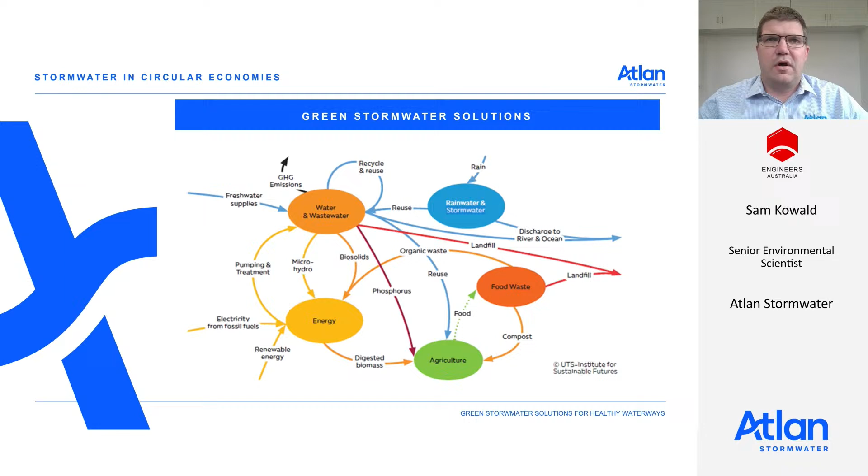The way we choose to design our stormwater systems is linked to the overall purpose and design of our developments. Where possible, we look to find ways to reduce and reuse resources, optimise space, and use existing design elements, such as open water bodies that are already being proposed, for additional benefits such as water treatment. We consider the whole-of-life costs of the asset we propose, and how it can be incorporated into a circular economy with manufacture that considers end-of-life, reuse and recycling. This provides us with tools to tackle complex issues like climate change and biodiversity while meeting local objectives for our projects. As advancements in stormwater treatment develop, they offer opportunities to help us meet some of the ambitious goals in sustainability and environmental management.

This is a brief introduction to the solutions I'll be going through today. The first is the floating treatment wetlands. This is a favourite of mine due to its flexibility and potential to deliver additional benefits, particularly related to habitat creation, back to the community and the environment. The second is the Atlan basin modular bioretention system. These products use the principles for water treatment we observe in nature, and refine through testing and research to deliver improved performance and functionality for our clients.

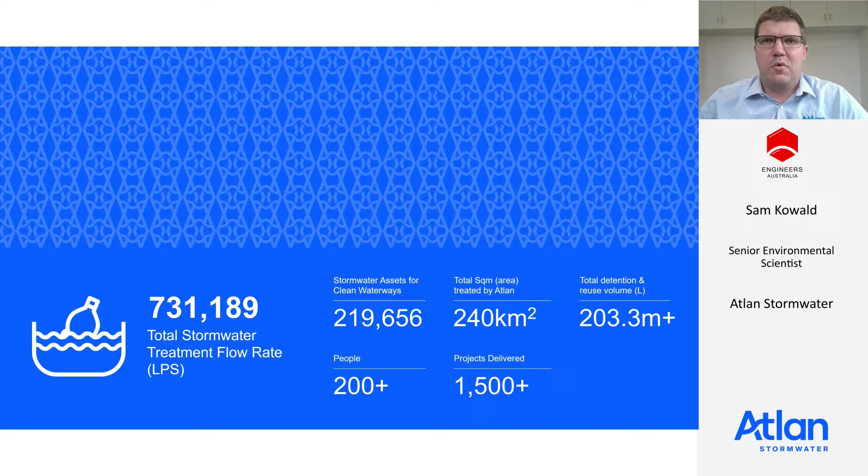At Atlan, we are proud to increase the joy in water experience for as many people as we can. We like to bring our knowledge and experience together with the project knowledge of the engineering team to find the best design to meet and exceed the expectations and objectives that we've been set for the project, always with an eye on where we can add more benefits for our clients and the community.

When we look at designing anything in life, whether it's a car, a mousetrap, a road or a wetland, we start with what we know works well and look to find improvements where we can. For us, nature has provided us with a baseline that works well. Through understanding the underlying principles nature uses, we look to enhance these to deliver the best performance possible, while incorporating design elements that make the system easier to work with and maintain.

The treatment principles we are using are nothing new. Nature has been using floating islands to process and remove nutrients and other pollutants from water runoff for thousands of years, just as it has with natural wetlands. We looked at the principles that were providing this treatment and developed our modular design based on our observations. We developed a structure that was easy to use and gave us the opportunity to control the layout and placement, making it manageable in the urban space and allowing us to bring the treatment concepts we found in nature to our clients' projects.

A critical element of the performance and function of each island is plant selection. This often starts with a proposal from our team, and then we work with other stakeholders and take their comments on board to select the appropriate species that will suit the site and provide the desired outcomes.

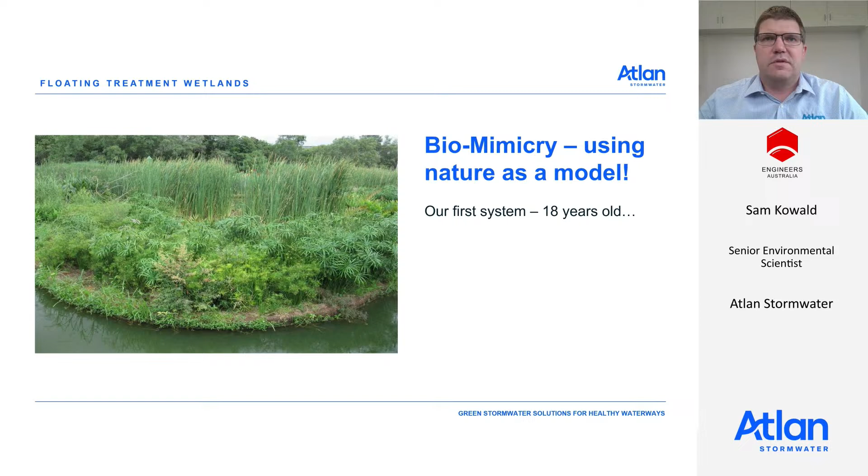Some of our industry partners like to include native flowering plants to attract butterflies, bees, and other insects. Others ask for unplanted zones that become nesting areas for water birds, or internal water zones that provide a protected water surface for aquatic species.

The roots below the islands and the plant structure above create a unique opportunity to build habitat above and below the island and treat the water to a high level at the same time. The root structure is also important to the overall pollutant removal capacity, creating an ideal structure for biofilm formation.

Part of our investigation into how nature treats water was looking at constructed wetlands and understanding how they work and what pathways they were using to remove nutrients and other pollutants.

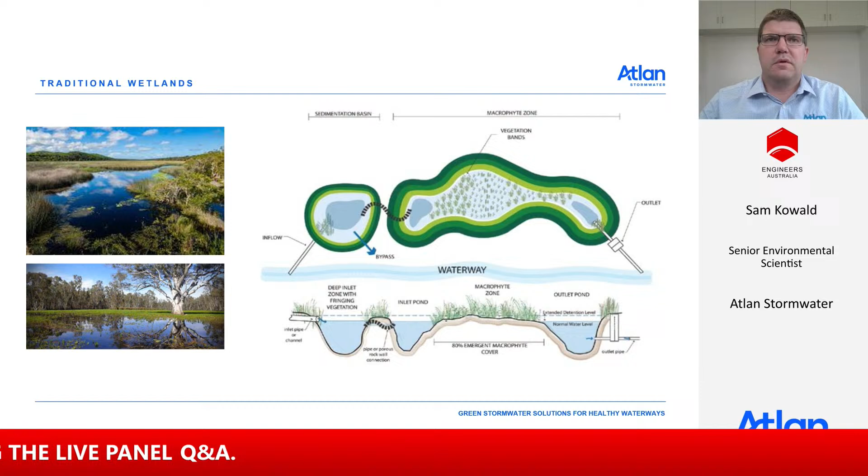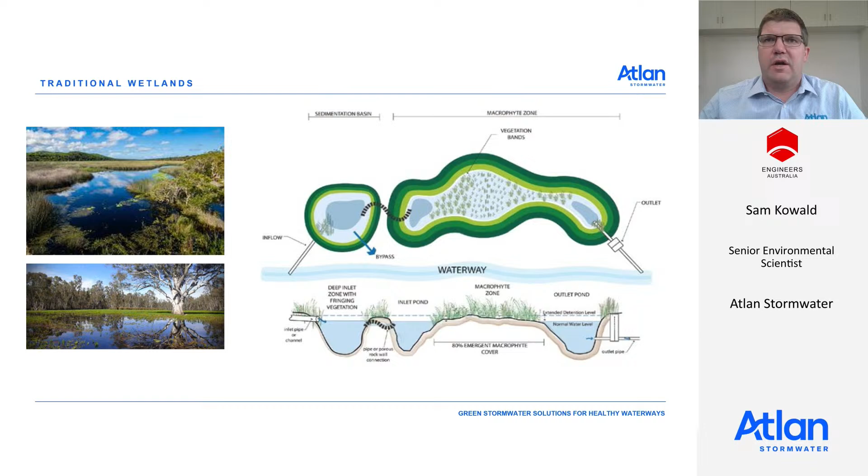Constructed wetlands use complex flow paths and deep and shallow water zones to increase sedimentation, promote plant growth, and provide a structure on the stems of the plants that are in the macrophyte zone for biofilm formation, allowing nitrifying organisms to grow and process nitrogen.

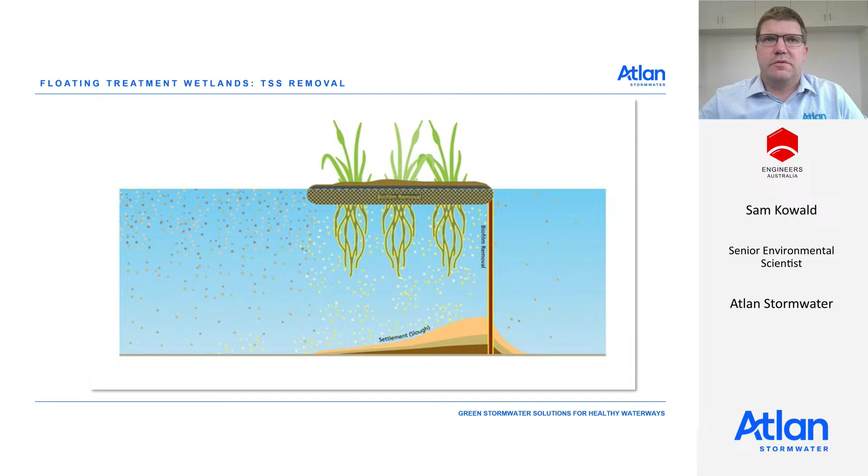Floating wetlands use the same main removal pathways as constructed wetlands, but each of them is increased. The root structure in the water column provides more sedimentation, and the sticky biofilm also captures particles from the passing water. When the biofilm collects enough particles, it will fall off the root structure and settle to the base of the pond.

The placement of the islands on the floating surface of the water means the plants are in their optimal growing location, regardless of the water level in the basin, increasing plant growth and nutrient uptake.

And finally, the roots growing into the water column provide a significantly increased surface area for biofilm growth, which increases habitat for nitrifying bacteria and other microorganisms that process nutrients.

Floating wetlands are a flexible solution to improve the functionality of our waterways and lakes. On a new site, we simplify the basin design by giving the option for a water body to be uniform in depth. On existing water bodies, we identify the optimal locations and select the appropriate position for the islands that works with the natural contours and flows in the lake or pond.

By adding islands and their root structure onto the water body, we add complex flow paths and replicate the deep water, shallow water, and macrophyte zones in the islands and open water section of the water body.

You have a massive design feature when working with open water bodies as part of your development, and if used effectively, there can be considerable benefit not only to your water quality, but increased habitat creation, and it can be an effective part of reducing the likelihood of algal blooms as well.

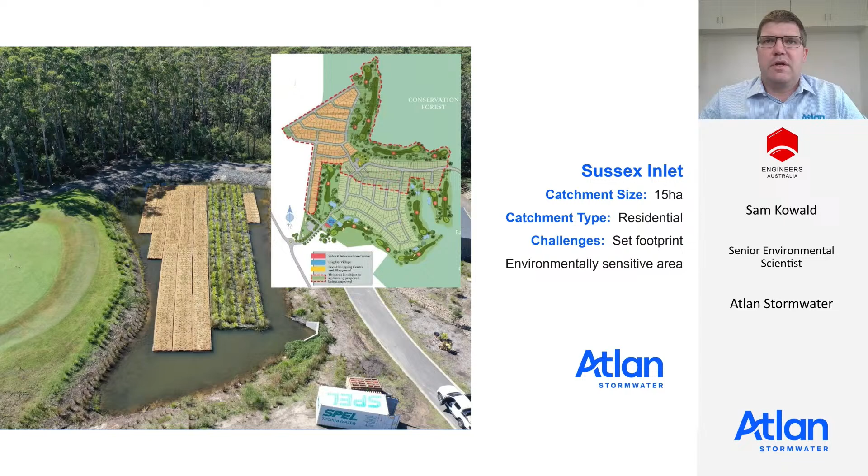The Sussex Inlet Golf Village is a development we have been involved with on the New South Wales south coast. It's a residential development that used floating wetlands as part of its stormwater treatment. Close to natural bushlands and designing around an existing golf course, the developer wanted to use the existing water bodies if possible to help meet their water quality objectives and protect the downstream inlet waterways.

The project was delivered in stages as the development progressed. After the installation of 200 square metres of floating wetlands in stage 1, the green and gold bell frog, an endangered species, was identified on the islands, and funding was approved to increase the floating wetlands as part of the stage 2 works.

Around 550 square metres were installed as part of the stage 2 project. The modular design makes the process of increasing the footprint of the islands simple if additional treatment is required.

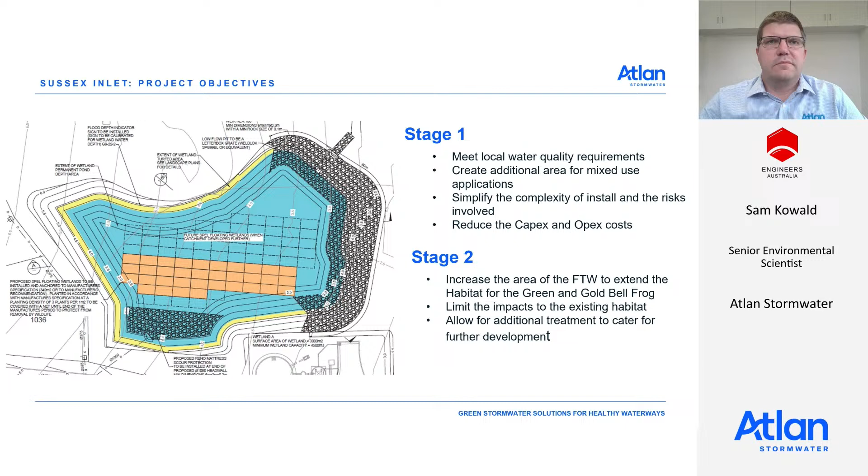The inlets to the lakes were pre-treated using Atlan vortceptors to remove gross pollutants and coarse sediment, allowing these pollutants to be easily maintained from a single location and holding the captured pollutants underground away from UV light. Then each stage of the floating wetlands was sized to mitigate the impact of the development in that stage.

We have had clients use our floating wetlands as nesting habitat away from terrestrial predators such as foxes, and fish habitats using the root structure. We know it forms a great substrate for biofilms, and frogs have been seen in various locations.

More commonly, we size our floating wetlands for water quality purposes, and our clients tell us stories of swans and ducks always sitting or nesting on the islands, or the fish swimming between the roots that their kids noticed when they showed them what they were doing.

We have found that using nature's principles in one area, such as water treatment, often flows on to natural benefits in other areas.

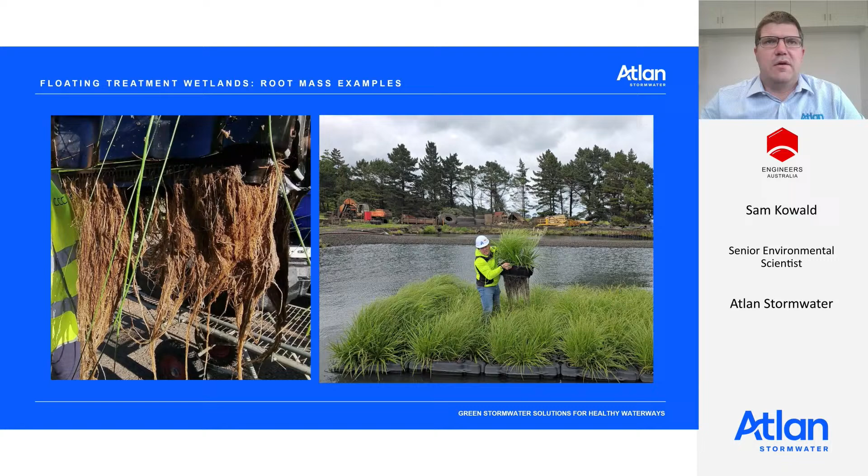Our latest improvement to our floating wetland design has been to offer more options and flexibility to our clients by moving to a smaller modular system. This allows us to adjust our layout and gives us more confidence in the structural performance of the system.

The new modules come with a flotation pod for buoyancy and a planting tray that allows us to adjust the recommended media to suit our plant selection if required. I had a client who wanted to use bulbs in their plant selection, and we decided that we would replace the standard media from one in every ten trays

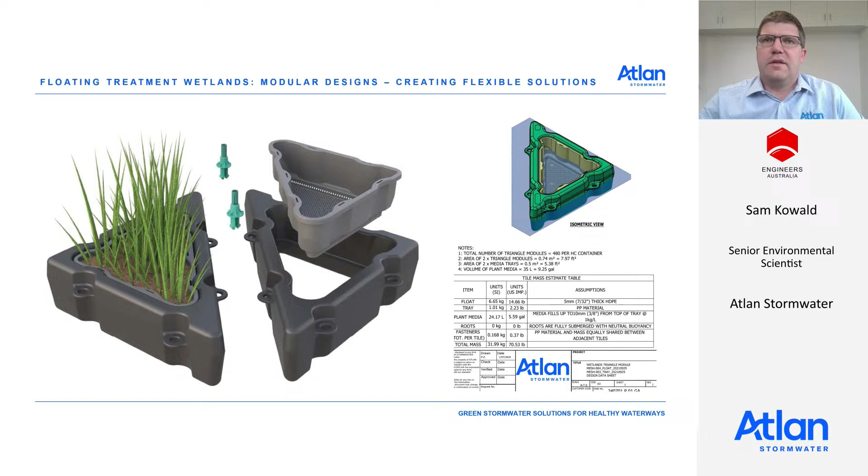to have more soil layer so that it would be more likely that the plant would work. As mentioned, our smaller modules allow our clients to adjust the design to include internal open water or give them the aesthetic they are after, whether this is a longer shape or an irregular shape to suit the contours of the bank on site.

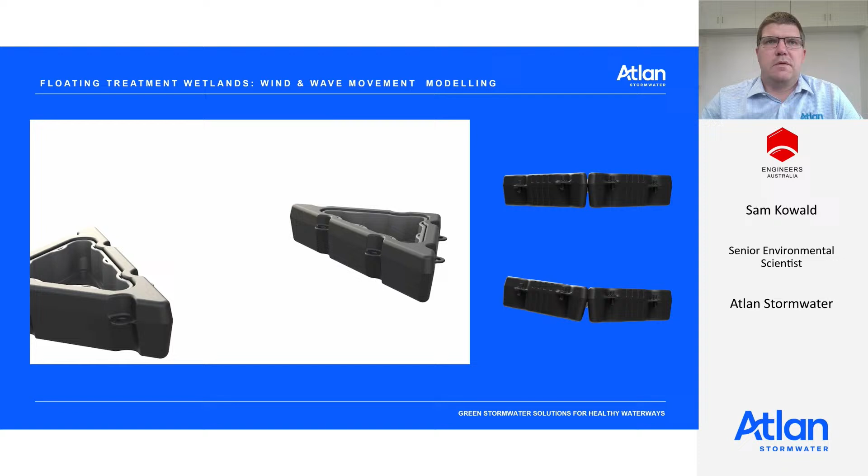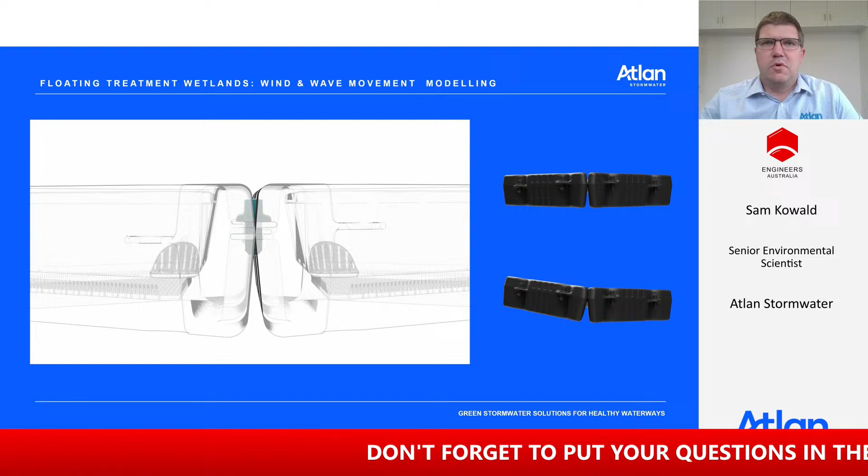Using our triangular modules and patented locking pins allows the islands to move with the water. Each connection can move up to 10 degrees up and down, reducing the forces that wave motion places on any given point of the design.

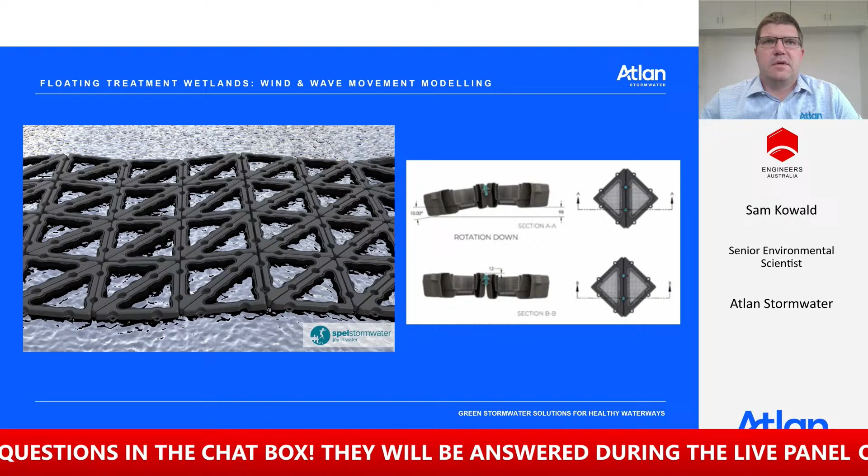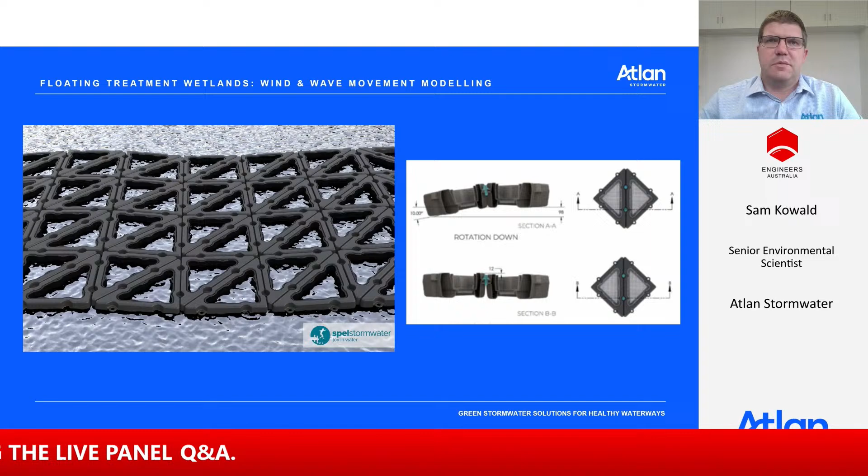Even in large island installations, the ability for each module to move relative to the module next to it means we can scale up our installations with confidence in the structural performance. Our systems have been externally structurally tested to ensure our anchor points and internal island connections exceed requirements of site, taking into account wind drag and water flow drag, and directing our anchor point and tethering designs. While our basket design encourages maximum interaction with the root surface and passing water.

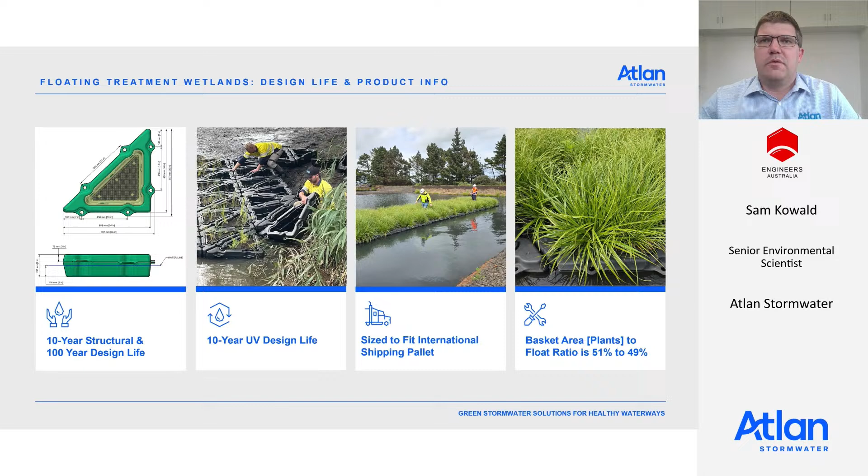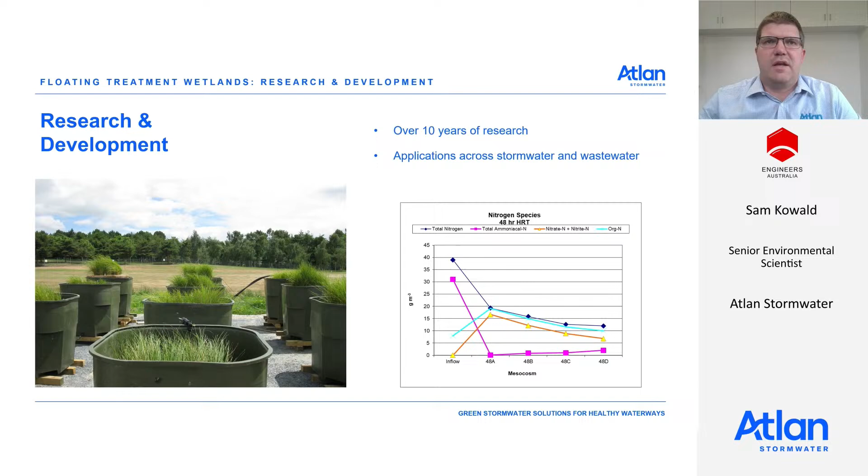At Atlan, we are committed to testing our products to the highest standards we can, and part of this is the independent testing we've done on our floating wetlands at multiple locations to understand what these systems are capable of. We have studied nutrient removal microorganism communities to try and better understand what is happening in the biofilm and plant selection. We are aware of other papers that have investigated heavy metals, PFAS, and methane reduction.

We commissioned an independent literature review of the nutrient removal papers available to guide us in our design process and removal claims, and this gives us confidence in the claims we make in the water quality space.

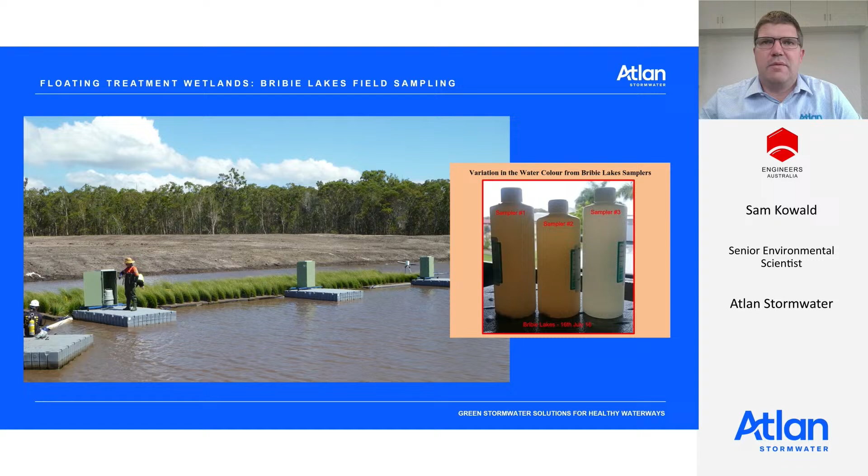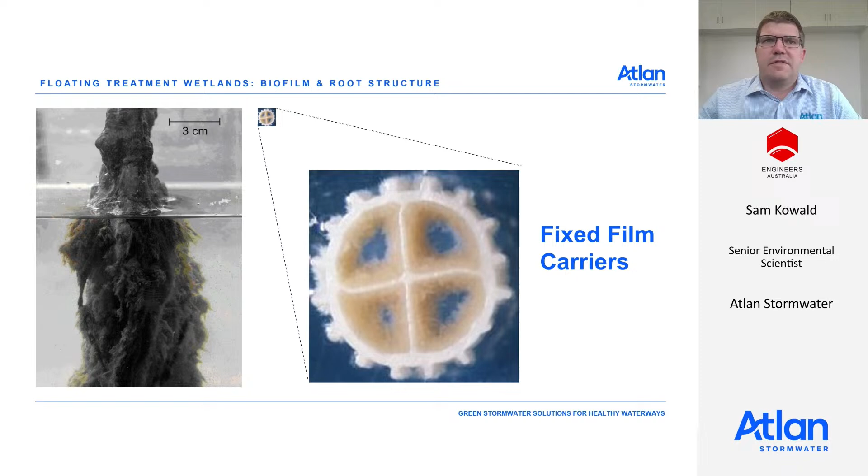As mentioned above, biofilm is one of the main drivers for nutrient removal in the floating wetland systems. As you can see, biomedia pellets commonly used in aquaculture and aquariums look to increase the surface area for biofilm formation as well. Any object that sits in a natural water body is likely to develop biofilm, and surface area is key to increasing the potential associated treatment.

Biofilm is an active living surface that provides an environment for a vast range of organisms, and some of these help to process the nutrients from water.

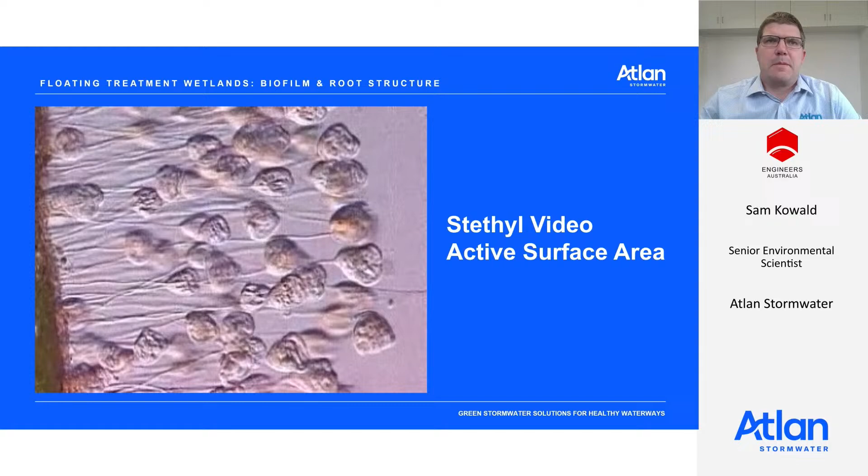When we use roots as a substrate for biofilm formation, we create a surface that is much larger than comparable solutions, with each fibrous hair within the root mass creating an additional surface area. We studied the biofilm and identified over 3,000 species of microorganism present within these layers.

And this thriving tiny ecosystem includes nitrifying and denitrifying bacteria, as well as consumers that process nutrients from the water column. The roots provide a carbon source as well as oxygen at times that allow the biofilm to thrive, and the diversity of the microorganisms in the biofilm makes it resilient to change.

If the conditions in a water body shift, the population concentrations will also shift, increasing the species that are suited to those conditions and giving better performance for the biofilm in the long term.

As previously mentioned, the plant roots play a vital role in not only taking nutrients and other pollutants from the water into the plant structure, but they also provide the building blocks for a healthy community of microorganisms. And this becomes the base of the floating wetland food web.

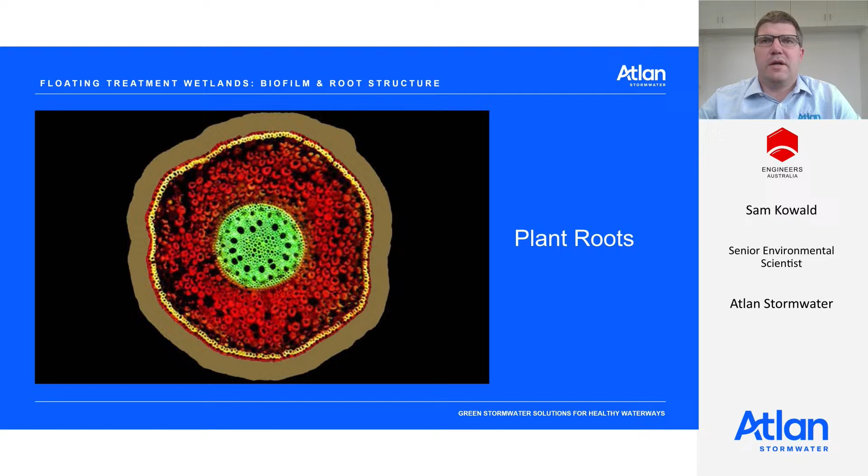Each layer in the biofilm interacts with the layers around and provides the nutrients and prey for the next layer. Healthy biofilm growth allows for increased processing of nutrients through this mass transfer process.

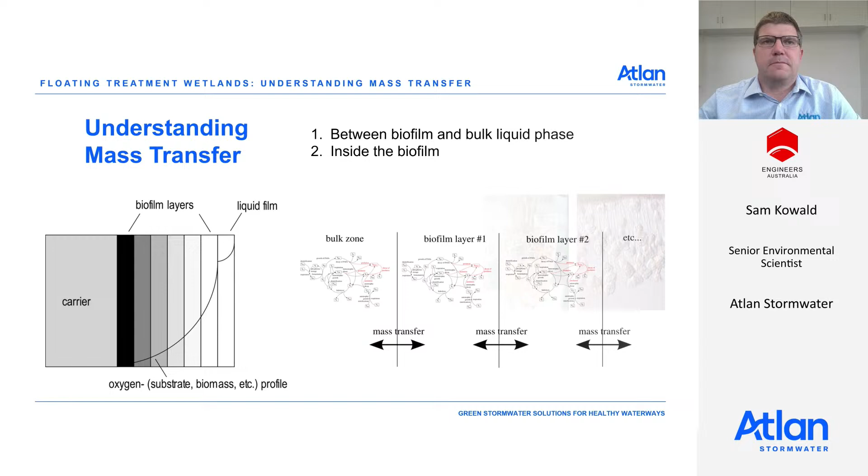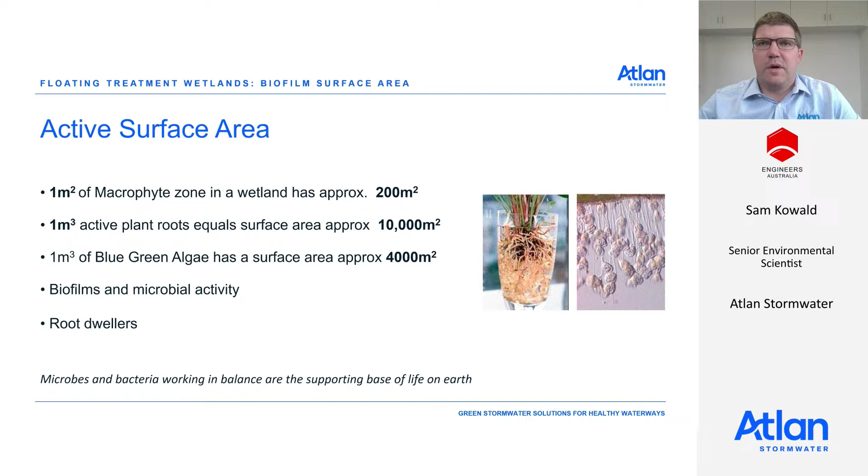1 square metre of floating wetland with a metre of water underneath has the potential to create around a hectare of available surface area for biofilm formation. Even an equivalent volume of blue-green algae doesn't have as much available surface area, and this helps the floating wetlands outcompete algae for resources, particularly over time.

The processes in the root structure can broadly be placed into 2 categories, aerobic and anaerobic, and it's likely there will be a balance of each in different areas of most large floating island installations. While both process nutrients using different pathways, we often look to the application we are working with to decide how to manage the balance.

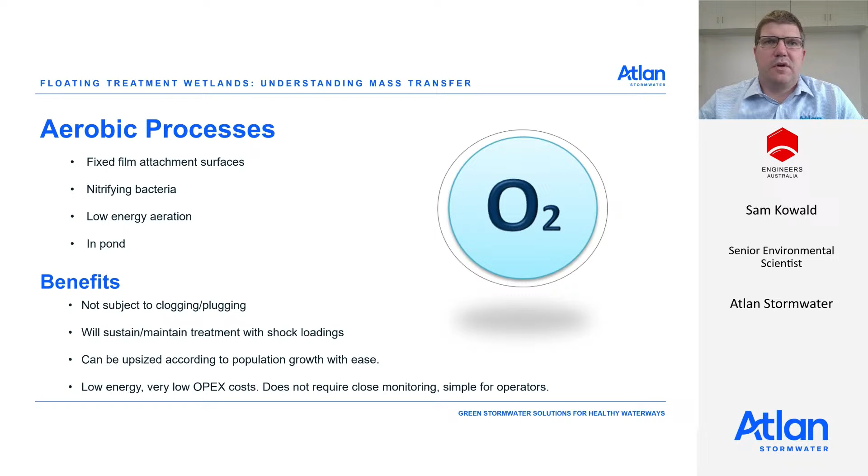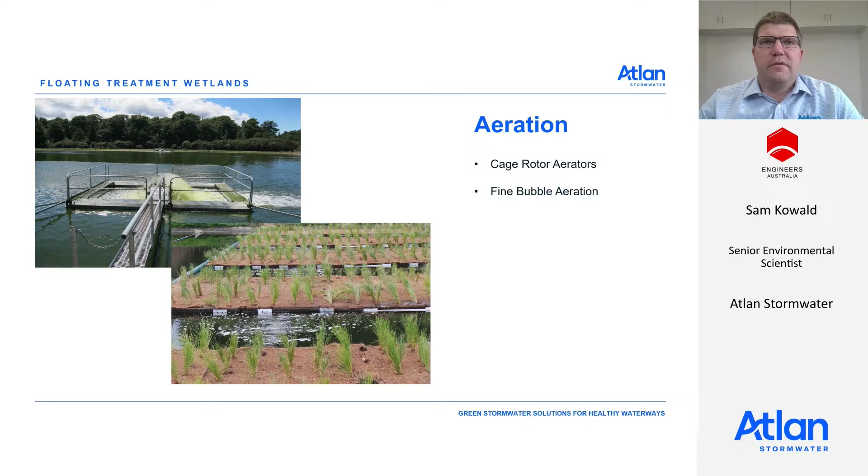While also effective at removing nutrients, anaerobic conditions are mainly used where nutrient levels are extreme, and alternating between phases can produce higher volumes of nutrient removal. This is often in the wastewater application, where additional performance is desired and other life in the water is not as precious. Part of the anaerobic strategy may be to cover the open water body between the islands and isolate the water from both air and light. Natural processes in the water will then use up any available oxygen, and the anaerobic processes will take over.

The advantages are that light needed for algal growth is restricted, providing the floating wetlands with an additional competitive advantage to remove more nutrients.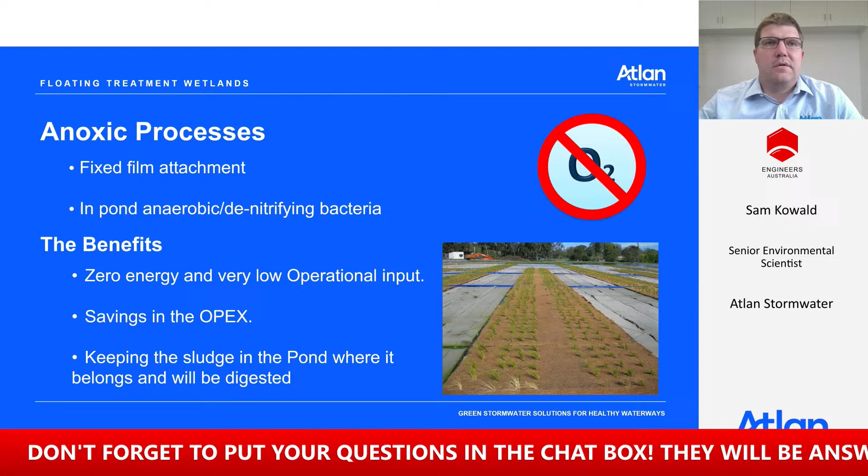One question that we're often asked is about the buoyancy of our system. The modules have been designed to be able to be walked around on to complete maintenance tasks if required, with enough additional buoyancy to account for plant growth. Each modular tile has 45 kilograms of additional buoyancy, and when installed and connected with other modules, they support and stabilise the neighbouring modules.

I have a short video done by our Queensland Operations Manager. This video highlights the buoyancy and movement of each module with the modules next to them, as well as plant establishment after 3 months and some other design options.

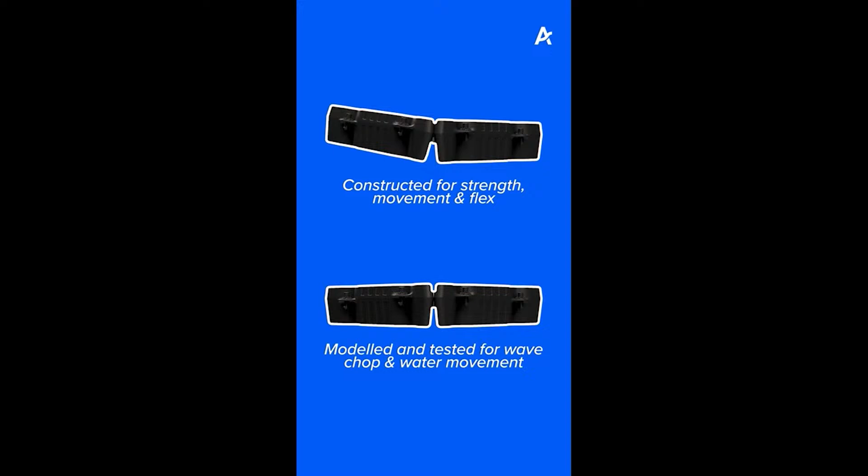Hey guys, Brenton Turner here from Atlan Stormwater, the Queensland Maintenance Operations Manager. Just up here maintaining the floating wetlands up at Dalton Drive. Just check this out. Beautiful condition, growing really well, really happy with how they're growing. All the greenery here, some of the other side, just looks absolutely beautiful. I weigh about 100 kilos, just sitting right in the middle, nice and supportive. Up at top again, looking beautiful, immaculate.

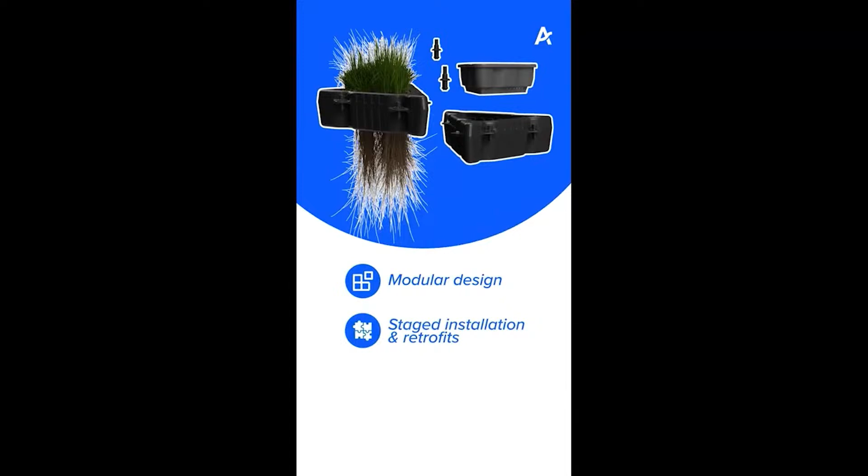Anchoring and tethering are designed to suit the location they are being installed to. We understand that every project is different, and we have experience from a range of projects that allow us to customise the anchoring and tethering for the site conditions.

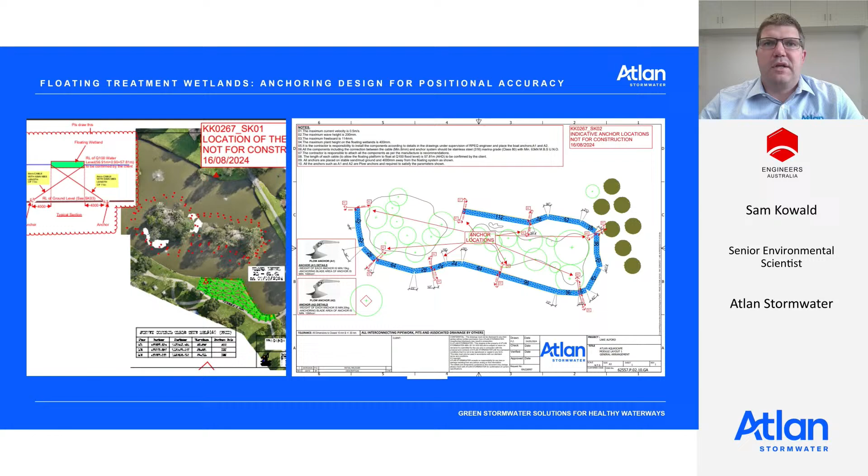We used strategically placed plough anchors around the installation and crossed the anchor lines under the wetlands to improve the stability and angle working on each anchor. We then manufactured brackets to attach the modules at each bend in the design to achieve the shape required for the island.

Our modules have undergone a range of structural testing to make sure that they can cope with all the forces they are likely to see on site. Our modular design allows us to provide solutions which reduce risks when maintaining floating wetlands, including walkway options and removable handrails.

Establishment is the highest operational cost for biological assets. Melbourne Water mentions 5 times the ongoing annual cost to maintain wetlands for each of the first 2 years of a constructed wetland. Our standard proposal includes 12 months maintenance as part of the cost of supply to ensure that establishment goes as smoothly as expected, and we have an experienced maintenance team that are happy to continue completing the works themselves or educating an on-site team to do maintenance.

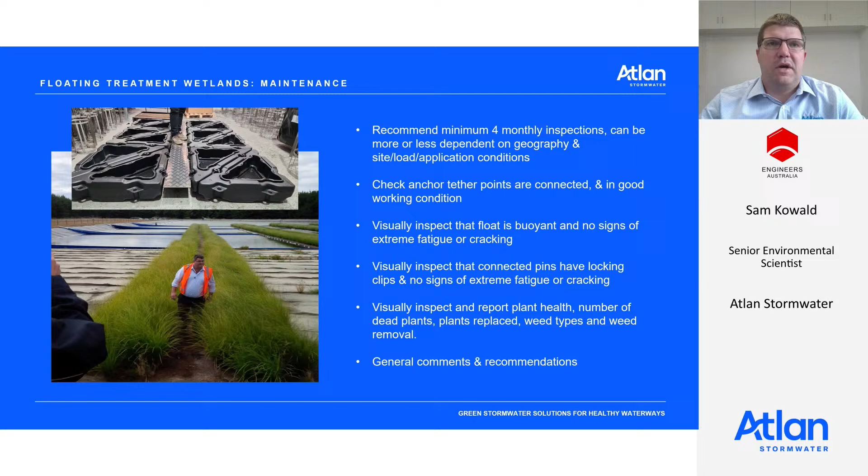Creating the optimum growing conditions allows our islands to establish quickly without a requirement for monitoring and adjusting water levels for plant health. As mentioned earlier, floating wetlands also eliminate the risk of your plants being covered in construction load sediment, which gives you the flexibility to establish and start treating your water earlier in the project.

The quick growth and establishment of the selected plants also reduces the rate of weed recruitment by outcompeting for resources and space. And the reduction in footprint of floating wetlands compared to conventional wetlands reduces the whole of life cost of the asset.

We can accommodate bird netting or plant protectors if desired, and can discuss these options with you to meet your desired outcomes.

We've been involved in a number of small community-based projects that have engaged with community organisations and land care groups or councils to not only supply the islands, but also help educate on water quality, habitat creation, and the importance of our actions as residents, such as cleaning up lawn clippings and putting them in the green bin rather than washing them down the drain.

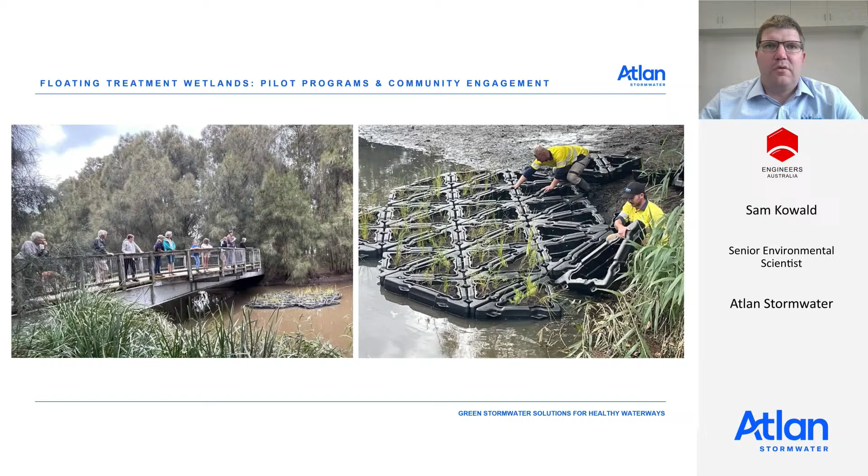Our hope is connecting with individuals in the community and getting them involved in interesting local environmental initiatives might spark an interest in water quality and give them a passion for looking after their local creeks and lakes.

Floating wetlands can be used in a wide variety of applications, from water quality and remediation projects to habitat creation and controlling the desired aesthetic outcomes of a water body. When used for treatment, we can offer a reduction in footprint required and reduce both the capital and operational costs of the asset. The beauty of working with floating wetlands is often seeing multiple benefits appear as the project establishes.

The second solution I'll introduce today is another product that replicates and improves on the principles of nature. That is the Atlan basin. This product is often used by our industry partners to replace rain gardens and bioretention in their design, saving them space and allowing flexibility in the stormwater design.

Again, nature has provided us with the principles of water treatment, and it's our opportunity to learn from this and create a system that works with and enhances these principles and offers additional benefits to our clients' stormwater designs.

On this project, the designer we were working with wanted the option to reduce the footprint of treatment to work around services on a very tight site, while also offering a whole of life cost saving by reducing the complicated processes involved with best practice bioretention maintenance and meeting the green infrastructure requirements.

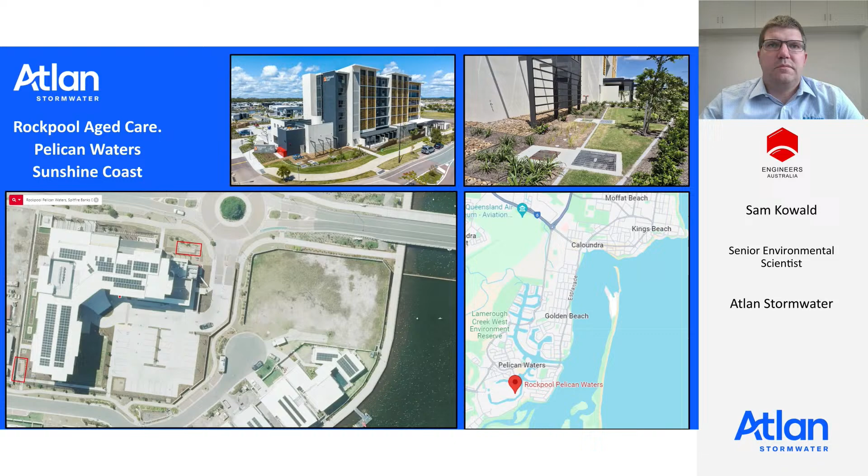When designing the Atlan basin, the whole of life was an important element to consider. We wanted to simplify cleaning and maintenance and increase the lifespan of the treatment media.

We did this by directing the water to an inlet pit and pre-treating the stormwater prior to the higher value treatment areas of the unit. This inlet pit design means that we can have a single point for regular maintenance. We remove gross pollutants as well as reduce sediment concentrations through hydrodynamic settling and a sediment filter before the pre-treated water passes into the tertiary chamber.

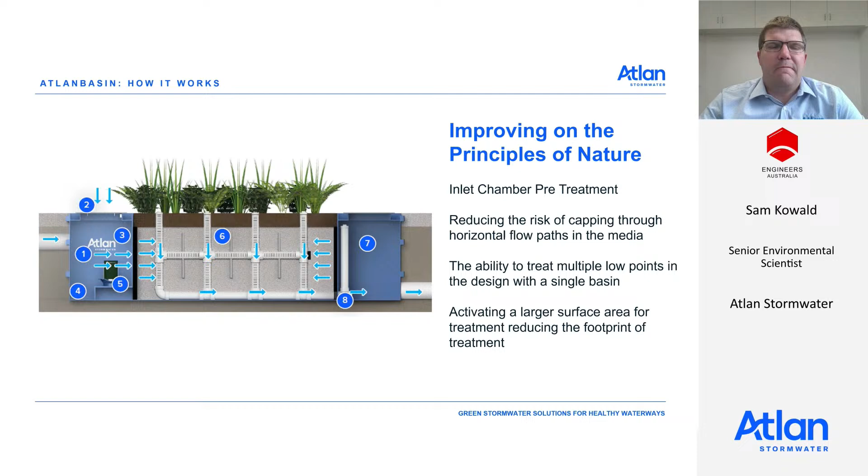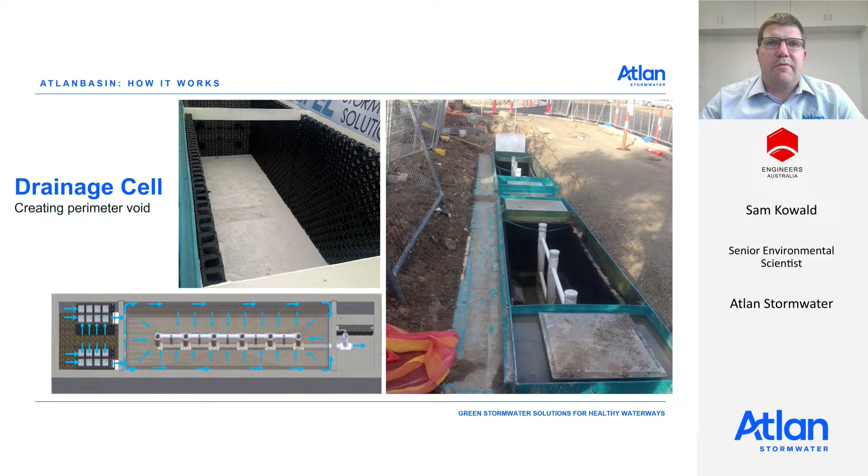The water flows into a drainage cell void around the perimeter of our engineered filter media in the treatment chamber. Once the water fills this void, it flows through the media to a central pipe system. This horizontal flow reduces the risk of the media blocking at the surface and allows our project partners to design a treatment system that services multiple low points in their surface design by having an inlet pipe from a neighbouring low point enter the side wall of the inlet pit.

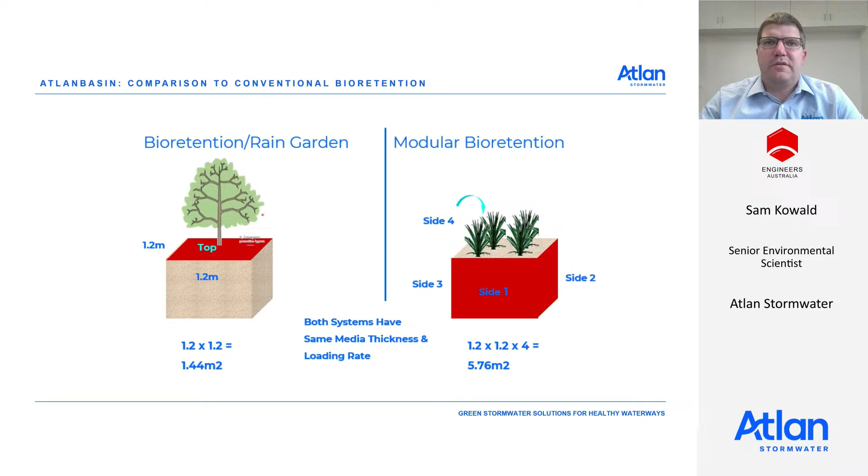Activation of all sides of the Atlan basin is the key element to allowing more water through our system by increasing the effective footprint for water to flow in the design, and allows us to reduce the required footprint, saving our clients space on site while maintaining a larger surface area underground.

The latest science, both internationally as well as coming out of Griffith University in Australia, regarding the release of microplastics, highlights UV exposure as a factor in increasing the release of microplastics from gross pollutants present in the environment or captured in sediment basins and bioretention systems.

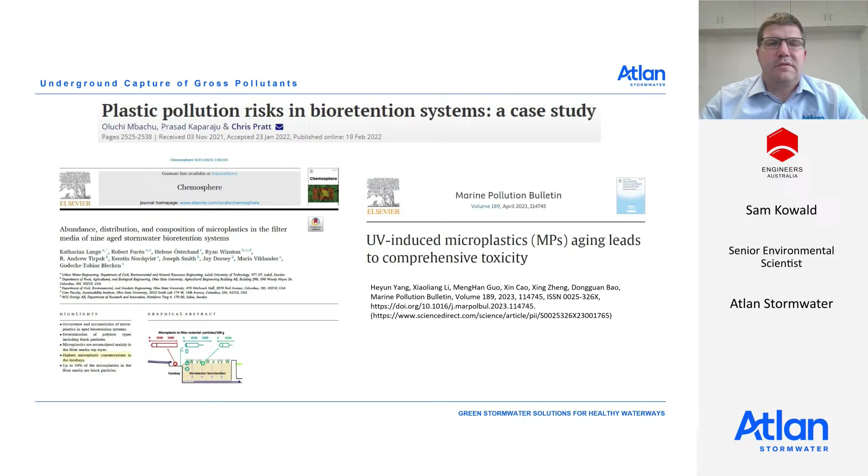The Griffith study goes as far as highly recommending in their conclusion that pollutants be removed from stormwater and held underground away from UV. This pre-treatment has been seen by many as best practice to extend the lifespan of the high-value assets within a stormwater design, and now the research is adding weight to the idea that pre-treatment is really important to the overall performance of a treatment train.

The Atlan basin includes this underground pre-treatment as part of the inlet pit, whereas conventional bioretention often uses a sediment basin or the media surface to stop gross pollutants, and this leaves captured pollutants open to attack from UV light.

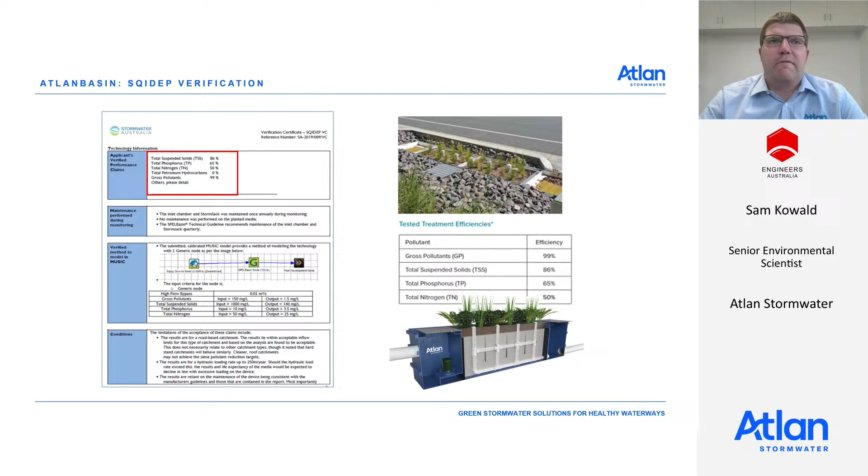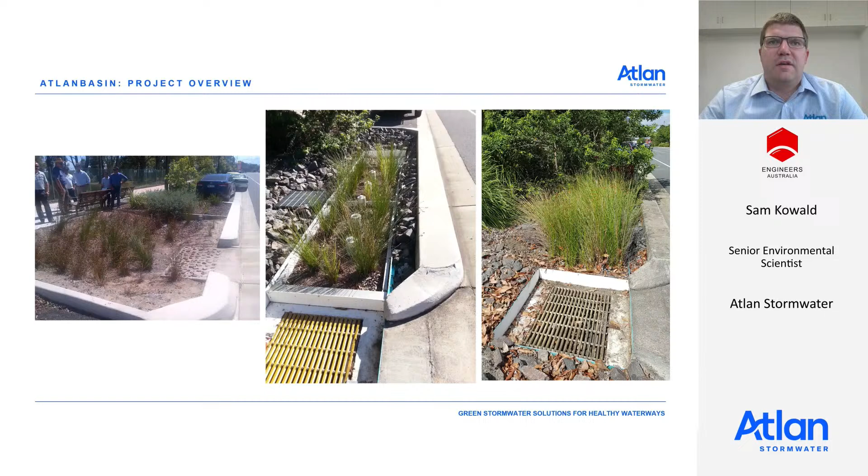This is our test site. As you can see, the basin tested was only a third the footprint of the rain garden that was originally used to treat the water at this location. We retrofitted our Atlan basin and were able to demonstrate that we could meet the required objectives and effectively treat the incoming stormwater.

When working with our clients, we have the flexibility to use multiple units wide or long to maximise the performance from the site footprint available. This can either be using side-by-side units or within a large pit or structure on site.

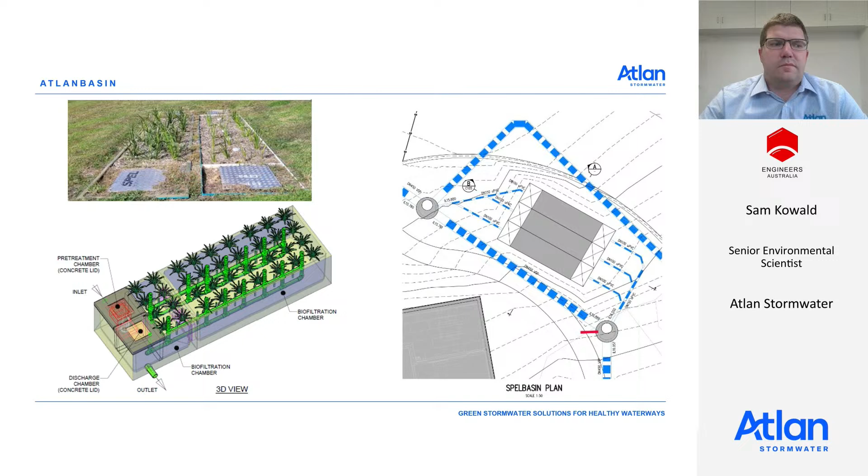As mentioned, the Atlan basin is fully independently tested and verified, and is provided to site and commissioned by the Atlan installation team, so you can have confidence in the performance and the benefits because we take ownership of the delivery of the project from early design through delivery, installation, and hopefully maintenance.

The long-term performance of our systems is our reputation, and we work hard as a team to make sure the system performs as it's designed. We provide critical pre-treatment and pollution holding underground as part of the design, to prevent gross pollutants from moving through the drainage network and discharging to the environment, where they can break down under UV light.

Atlan is committed to testing our systems to the highest standards, and in the water quality space, Stormwater Australia's SQIDEP guidelines provide a great comprehensive place to start.

The SQIDEP protocol provides an opportunity to compare the effectiveness of different styles of stormwater treatment used to meet water quality objectives. It ensures the samples are collected independently, sent to a registered, certified lab, and analysed and reported by independent academics, using a set of requirements that give confidence in the repeatable and representative nature of the results.

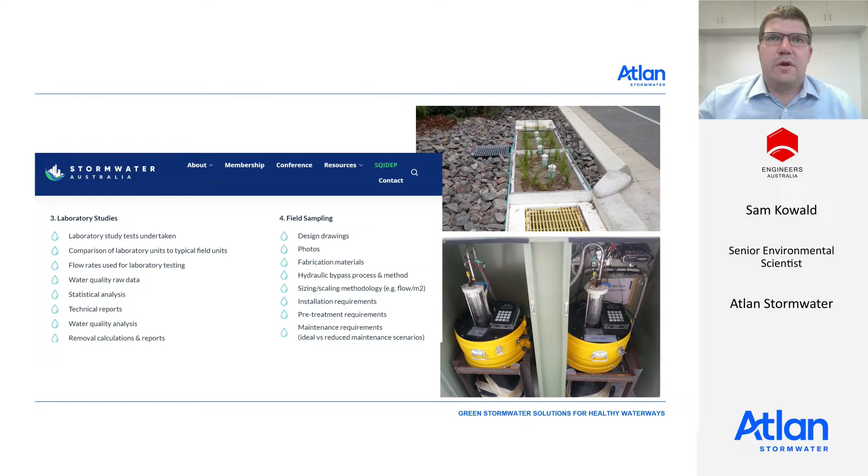It requires that the sampling captures the rising and falling limbs of the hydrograph for most events, and that the unit has at least one event above 100% of the treatable flow rate and another above 75% of the treatable flow rate, to make sure that the system is not undersized.

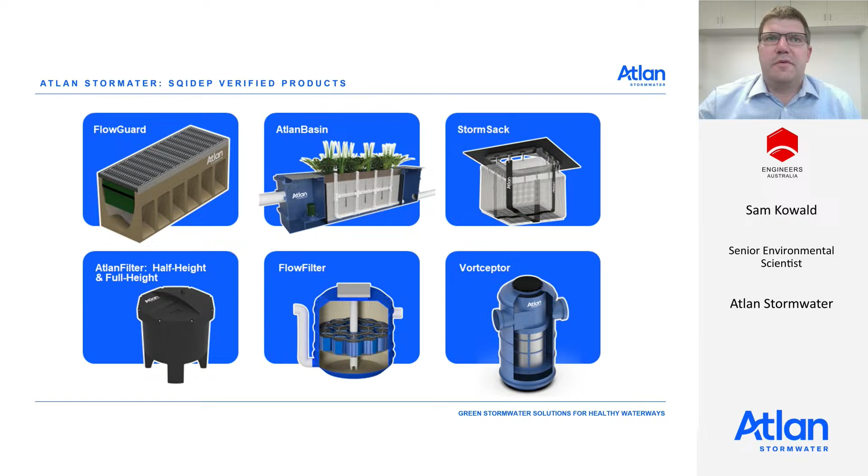Thank you for your time today. I hope that you've gained some knowledge regarding the innovative solutions we use when helping to design stormwater systems. Now I'll pass back to you.